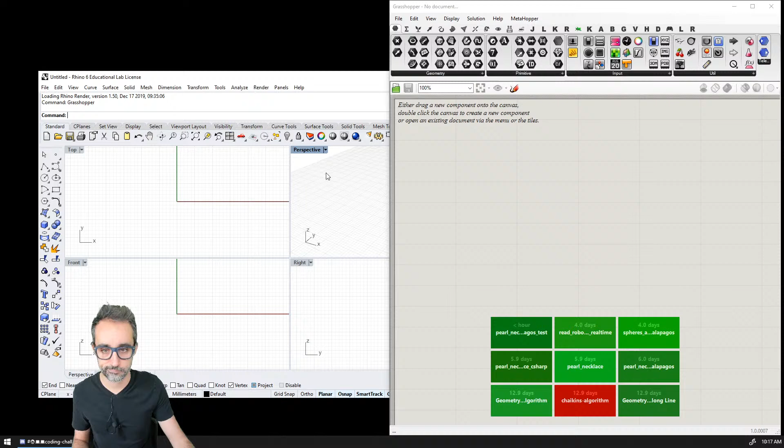So I'm going to drop this file. And I'm just going to pop here some curve, whatever. I feel like I always end up drawing the exact same curve, like this kind of gesture. Anyway, so here we saw, last week we implemented two ways of populating a curve with spheres, right?

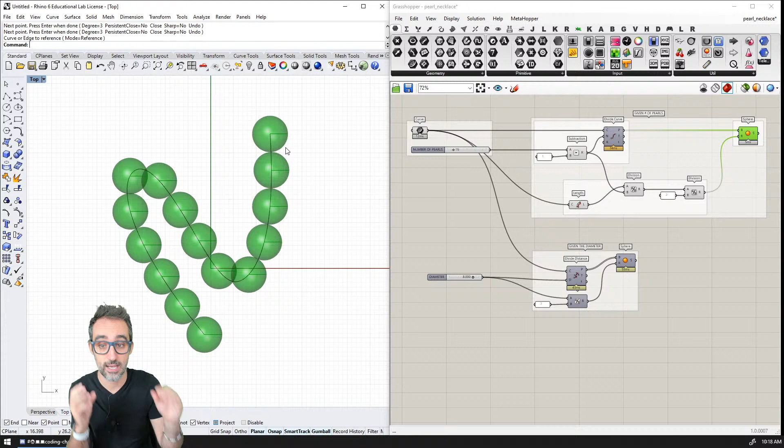One of them was given the amount of spheres, right? I'm going to do a top view here. Given the amount of spheres, we wanted exactly that amount of spheres on the curve, right? And if we control the amount, we can do a very simple algorithm where we subdivide the curve into equal length segments, and then place the spheres centered there, which is what we have, right?

The problem with that process was that, for example, this division between this curve is equal length to this one, but because this curve is concave, some of the spheres do overlap with each other, right? So that is a problem.

And we saw there was an alternative way, which is: well, if instead of controlling how many spheres we have, we control the radii of those spheres, and implement an algorithm where we make sure each sphere is tangent to the previous one and the next one, then we can implement that as well. But then what happens is that because we're controlling the radius of the sphere, we are not guaranteed that the last sphere will end at the end point of the curve.

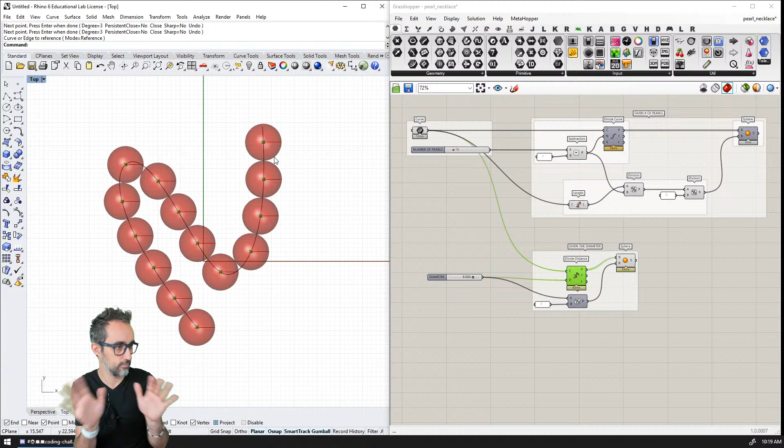And we will always have some remainder of distance between the last center of the sphere and the end of the curve. So the challenge, and this is a common problem, is that you cannot control all these parameters at the same time. You cannot control how many spheres you have on the curve and the fact that those spheres are perfectly tangent to each other. There is not a closed form solution to that problem, and not one algorithm that can give you that solution, because it depends very strongly on the shape of the curve.

So one way to solve these kinds of problems is through optimization, through genetic optimization, which is basically trying many different values and finding which one gets closer to an optimal solution. So for 15 spheres, let's try a lot of different diameters and see which value gives me something as close as possible to having this point be distance 0 to the end curve.

In Grasshopper, we can do optimizations with Galapagos. So the challenge for this week was to take this file and find a way to implement optimization with Galapagos, so that you can control both the fact that you have a controlled amount of spheres on the curve, and the fact that all of them are tangent to the neighboring ones, while fitting them with a radius that makes the solution as tight to the end of the curve as possible. One way of making all of those things work together is through genetic optimization.

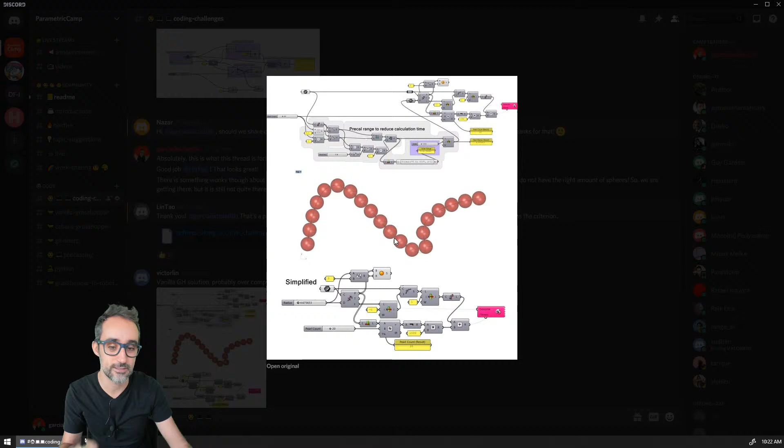That was the challenge for this week, and I'm very happy to show that a lot of people gave it a try, and some attempts got closer to the solution. Some were either missing one parameter, or the optimization boundaries got totally out of control. Some people did it in native Grasshopper, others implemented it in C#, even trying continuous execution, running a component multiple times until it converges to a solution.

I want to call this manual Galapagos, which I do want to get into at some point. I want to explain how to write code that does this kind of genetic optimization, but that's a little too advanced for where I think we are right now, or for the knowledge I'm trying to build, so I'm going to hold off on that.

I think Arasto is doing a really good job with these kinds of screenshots that explain the process, even with annotations and GIFs. How nice is this? And the optimization process, look, it's fitting, it's fitting, it's fitting. Bang! It fit. This is really cool. This kind of material for blog posts, for your personal website, and even for a portfolio is actually really good if you want to prove, for an application or employment, that you know what you're doing when it comes to code and design.

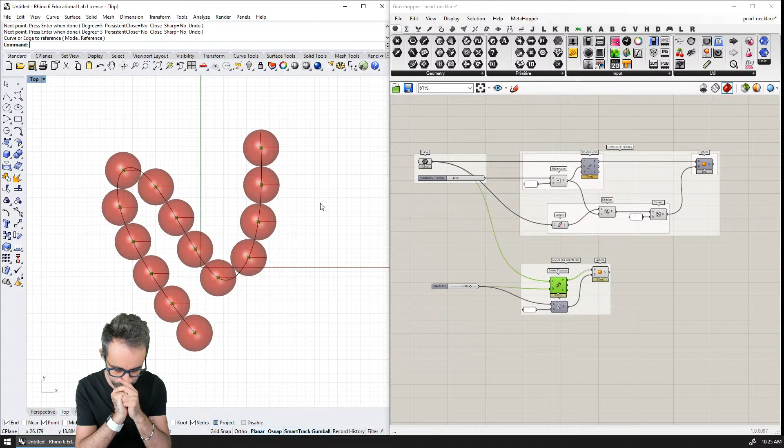Okay, so I'm going to do this video then. This is the third video in a series of other two where I solved this problem, first with vanilla Grasshopper and then with C#. So the third video, well, I think there's quorum on doing this one. This would be the third video on the series.

So I guess I'll do as usual, I'll record the introduction at the end. But I want to start the video by explaining what we're doing. I would explain that in the introduction, explaining the Galapagos thing.

So I think I'm going to start by explaining the problem statement, the fact that we cannot control everything at the same time. We cannot control the amount of spheres, the radius, and the tangency, and the fact that the spheres completely fit into the curve. So I'm going to explain that in order to do that, we need an optimization process.

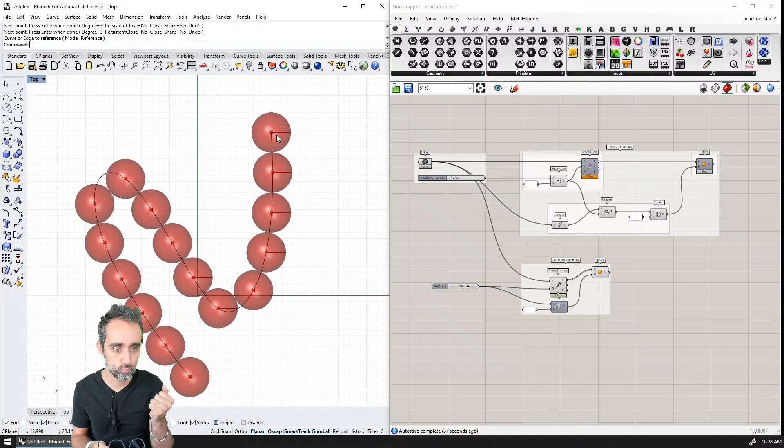And then we will use a genetic optimizer, so we will use Galapagos to try to solve that. I think that sounds good to me.

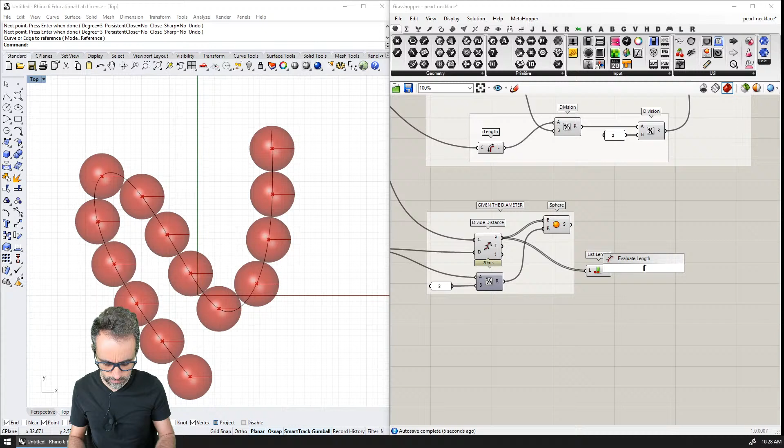Okay, and I need to add a component here to give me the length, how many elements I have in here. Okay, so I'm going to save this as pearl necklace Galapagos.

Okay, so I think we're ready to start, aren't we? I think we're ready to record. Yes.

I'm somehow having trouble finding the right words for this. I may have to do a couple of test runs first. But I know you're very patient when I do these things. So let's be a little patient on this one because I really want to get it right. It's also the first Galapagos related video that I'm recording, so I may want to take the extra time to explain some concepts until I record like a series, you know? Yeah, let's think about that. Okay, alright, so am I good in terms with the, yeah, okay. So let's start.

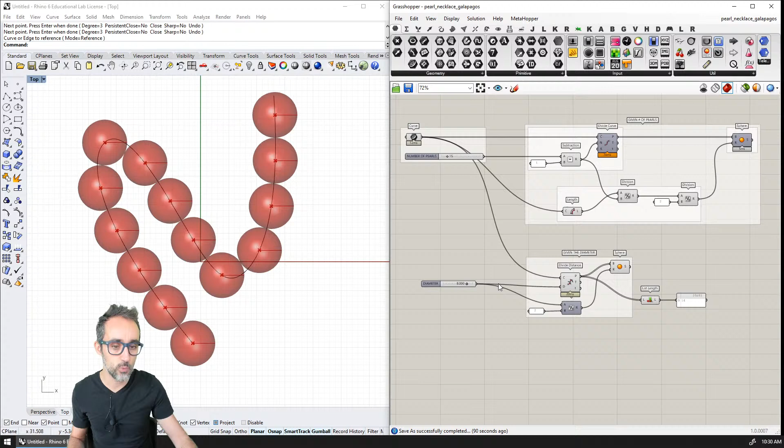Well, first of all, what I'd like to do before we start is make sure we understand the problem we're trying to solve very clearly. I'd like to remind you that we're coming from 2 videos ago where we solved the problem of trying to populate a curve with a bunch of spheres. We did it using vanilla Grasshopper, in 2 different ways. The first one was an algorithm where we could control the number of spheres. Because we subdivided the curve into segments where the chord length between them was equal, we knew all the spheres fit perfectly inside the curve, so the center of the last sphere was at the end of the curve.

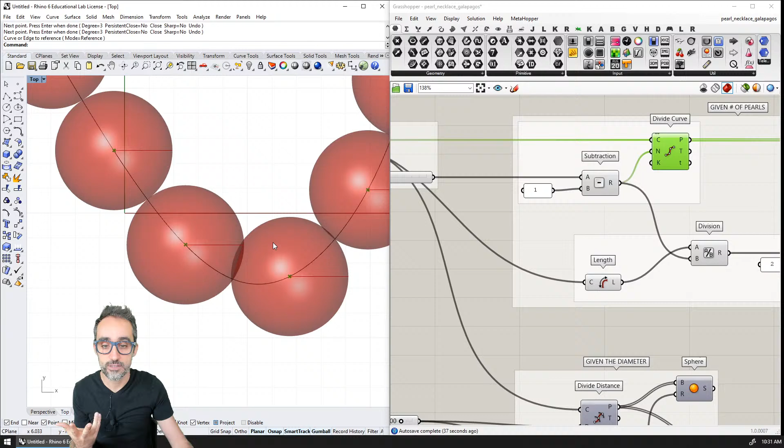The problem with this algorithm is that because we're using equal chord length of the curve, when that segment of the curve is very curvy, very concave, we have the problem of spheres overlapping each other. So you see this overlap here and this overlap here. That's not great if we're trying to model something that needs to be physically more accurate, right?

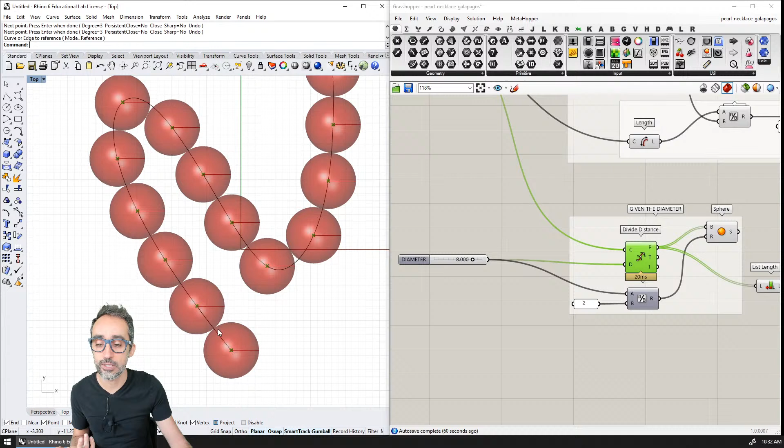So we did develop this other algorithm where instead we did control the diameter of these spheres, and what this component does internally is it places one sphere, it computes the intersection, it finds that, and then it places the next sphere, therefore guaranteeing that each sphere is perfectly tangent with its neighbors, right?

The problem with this one is that because we are controlling the diameter and this perfect tangency, we are not guaranteed, first of all, how many spheres we have. The smaller the diameter, obviously, the more spheres we have on the curve. And on top of that, we're also not guaranteed that the center of the last sphere is going to land at the exact end of the curve. Since this is whatever diameter, this sphere can end anywhere, basically.

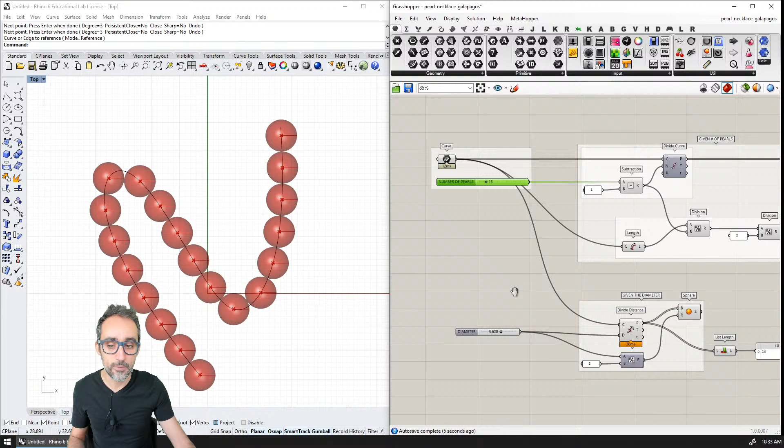So what we're trying to solve here is to combine more of these constraints. I would like to implement something where we can control the number of spheres. I'm also interested in the fact that these spheres must be perfectly tangent to each other. And on top of that, I want to minimize this distance so that the last sphere is as close as possible to the end of the curve.

With all of those constraints together, there is no closed form solution that I can use. Because where this sphere lands at the end of the curve depends very strongly on the shape of the curve, computing that algorithmically would be very complex, if it's even possible, which I'm honestly not very sure that it is.

So we're going to follow an optimization process. We're going to implement an optimization algorithm which tries a lot of different values of the diameter, basically throwing a lot of different dice, going through different ranges of values for the diameter. It's going to check first if we have the right amount of spheres, and then if the distance between the last sphere and the endpoint of the curve is as close as possible to zero.

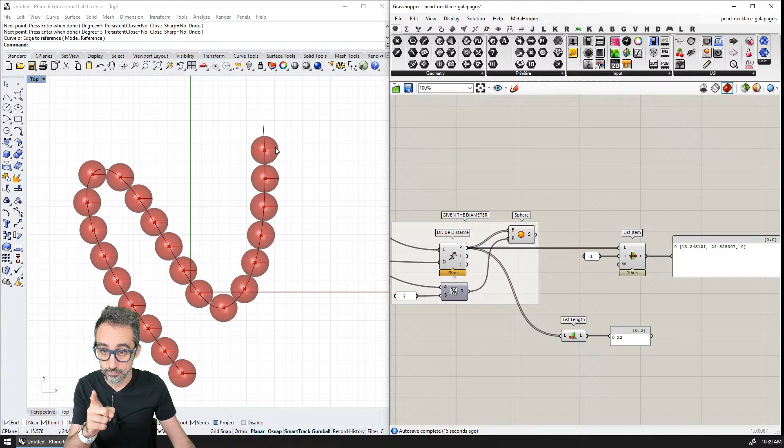Now, I also can take from the curve, there is the endpoints component that gives me, from a curve, the starting point and the end point, okay? So I could calculate the Euclidean distance, the physical distance between these two. And you know what? I'm actually going to start with that, but I will explain in a second why this is not what I really want to do. We will get there.

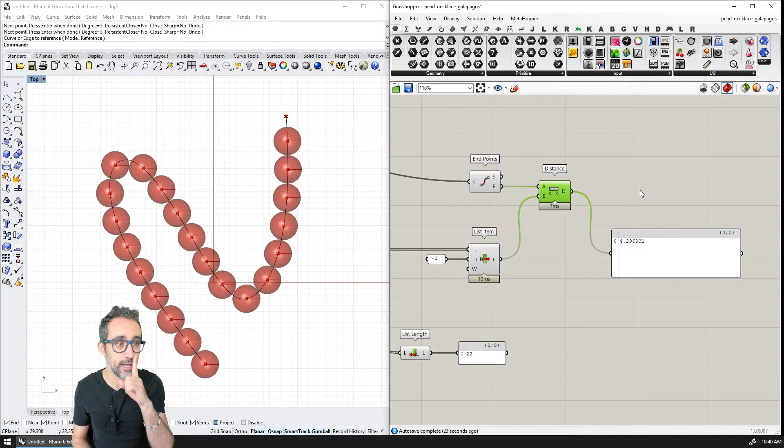So this distance is the parameter that I want to optimize. And by optimizing, what I mean is that I want to make sure that when I start trying different diameters for these spheres, this value is as close as possible to 0. That would mean that this sphere will be as close as possible to the end of the curve, right? And I think with this, at a very basic level, I'm already ready to start implementing a basic Galapagos test, because I have what I want to optimize.

I have the diameter of the spheres, and I also have the fitness criteria. The fitness criteria is the one value that I want to either maximize or minimize, the one value that I want to make as large as possible or as small as possible. And in our case, it's going to be this one, the distance between the center of the last sphere and the last point of the curve. So I'm going to drop here a Galapagos solver. This is here under utils.

You can just plug in Galapagos and you can see that, because this is an evolutionary solver, everything is phrased in terms of genome, fitness criteria, gene pool, evolution, etc. But it's actually much more simple than it sounds. So there are two things that I want to control. First is the genome, and the genome is how Galapagos refers to the value that I want to explore so that I can find an optimal solution for that value. In this case, that's going to be our slider for the diameter.

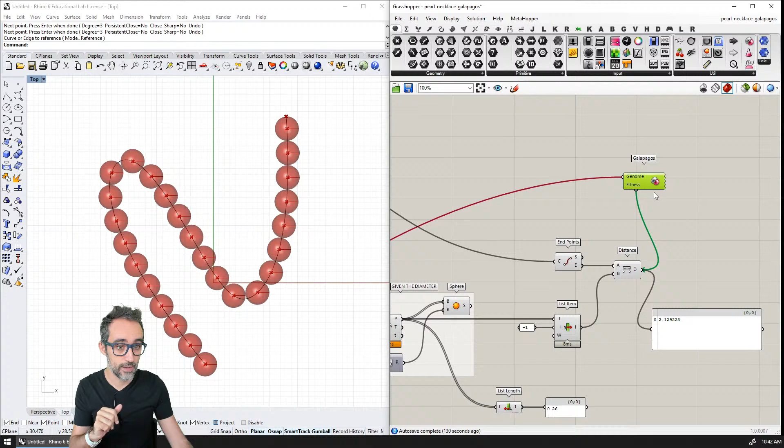That's the basics of how Galapagos works. So I can double click here right now, and you can see that in the editor, I have a lot of options. I'm not going to get into this at all. I have some links to blog posts by David Rutten, the author of Grasshopper and the author of Galapagos as well. These blog posts are actually really nicely explained, and they have really good graphics and really good illustrations. So if you're interested in this topic, I really recommend that you check this out.

The only thing that I would like to touch here, which is very important, is the fact that for the fitness, I have two options: maximizing the fitness or minimizing the fitness. In this case, I want to click on minimize because I want this value, the distance, to be as close as possible. If it was the other way around, if I wanted some value to be maximized, then that's what I would click. And then I'm going to click here on solvers.

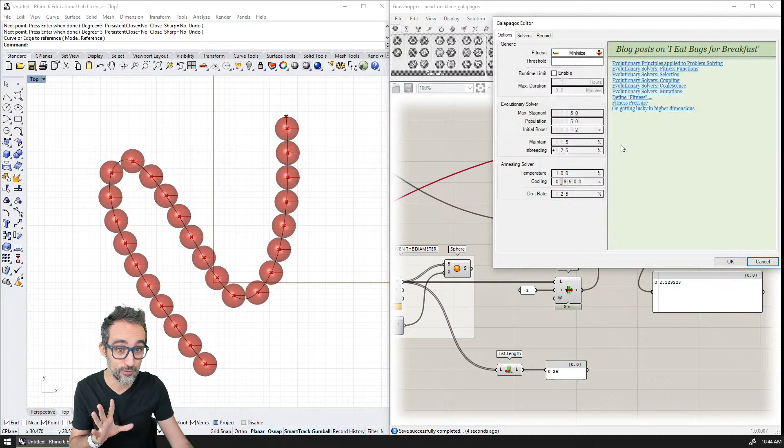Solvers is the area that gives me access to two different solvers, the evolutionary one and the simulated annealing one. I'm also not going to get into the weeds of how they work or how they're different. I will get to that at some point in the future. And then here is the Start Solver button. Let me first save this file because I believe we may run into performance and crashing issues. So let me do that.

And then when we go to Solver, I'm going to try my first run at solving this. So I'm going to double click here. I'm going to put this here. I'm going to put the solvers here, and I'm going to hit Start Solver. And what we're going to see is that Galapagos is going to start messing with the values of the diameter. So you can see that Galapagos right now is trying a lot of different values for the diameter, and is reading here from the distance what distance is getting, right?

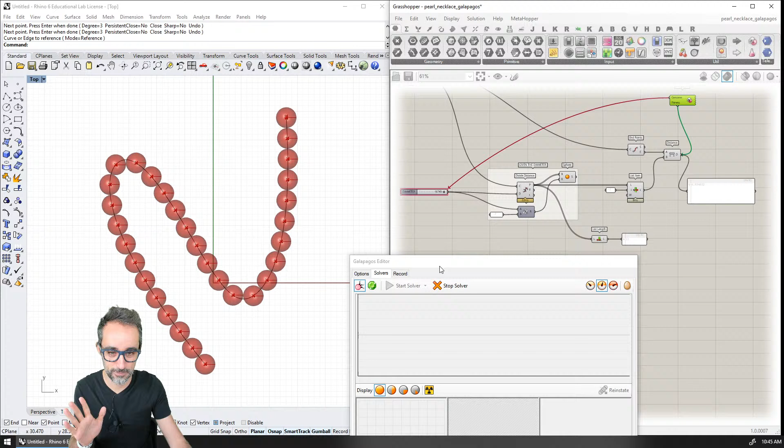But you can see that my computer is starting to be not very responsive, and I actually believe that we will probably crash very soon. Is that true? Are we crashing? Crash, crash, crash. Oh, it is crashing. Poor Galapagos. Oh, it's back. It's back. Well, I'm going to stop this. And you see it's not being very responsive right now.

I'm going to stop this because there are a couple things that I would need to change here. Okay? And I will explain why this is not. Oh, bong, it crashed. Oh no. All right, so you see, I'm going to need to restart. Let me restart and I'll get back to you in a second, okay? Okay. Oh, we crashed.

Yeah, actually, Arasto, you're right. That's one of the reasons spheres are kind of expensive, but it's actually not a problem with the spheres. It's a problem with the, what is it called? With the divide distance component, and I will explain that in a second.

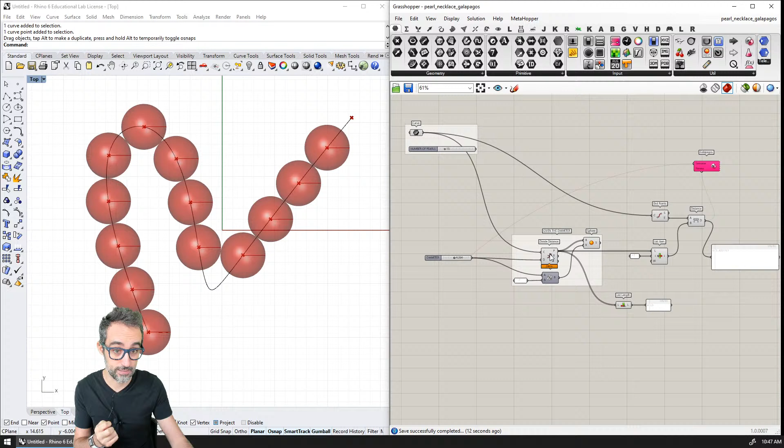Okay, so I need to explain now that the problem was that the slider can get very small. And when it gets very small, then this computation tends to infinity, basically. So that will be one thing to solve here.

Okay, we're back. The crashing didn't hurt that much. It's okay. I have a different curve because I didn't save this file, but it's fine. So why did we crash? Well, when we do optimization, optimization can be a fairly computationally expensive process. So if we also have other computationally expensive processes as part of the optimization, then things get very expensive, really.

And one of the problems that I was having was that this slider here, the one that we are trying to optimize, I didn't really take good care of making sure that the boundaries, the range of this slider, was good for an optimization routine. And what do I mean by that? Right now, the value of the diameter could range anywhere from 0 to 10. And look at what happens if Galapagos starts going into values that are on the lower range of this slider. So if the value of the diameter starts getting smaller, you can see that the divide distance component starts getting more expensive.

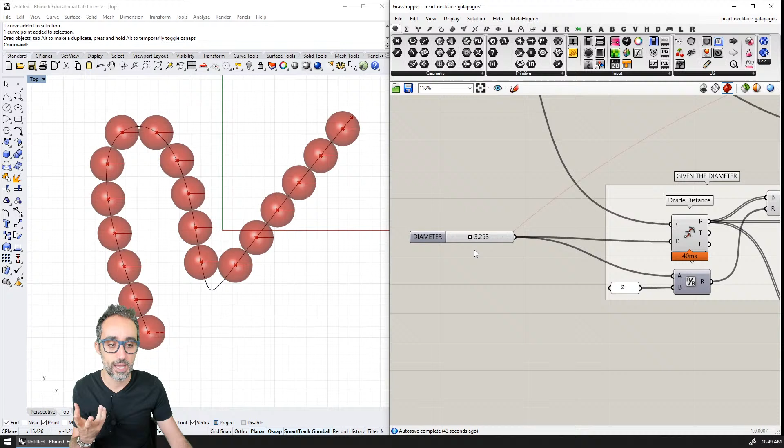expensive operation. So that's why as I go smaller with the diameter, you can see that the computation that it takes this component to execute just increases a lot. And right now it's blocked. You can see for this diameter, it took almost a full second to execute, right? And then if I go even smaller, for example, 0.1, I think I may actually crash it again, but it will definitely take exponentially.

You see, I'm crashing it again. No. Did we solve? Oh yeah, it solved. It took 10 seconds to compute this operation, and also to render however many hundreds of spheres there are here is also a fairly expensive operation.

So Galapagos was crashing because it was requesting very expensive operations due to the range that we had set for this slider. So one way to solve that is to constrain the parameter space that Galapagos can use to explore this particular value. And you can see that because we have 0, the closer we get to 0, the exponential growth in computational time could even lead to infinity, right?

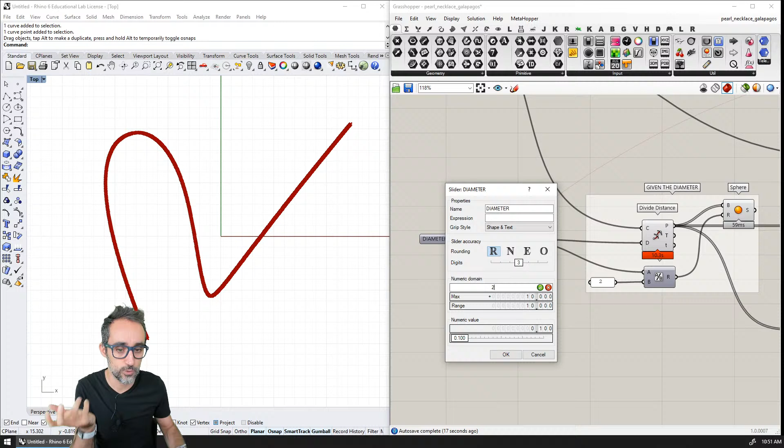So let's bound that. Let's say that the minimum value of the diameter is going to be 2, and the maximum value is going to be 10. We don't care, right? But as we do that, you see that the minimum boundary of 2 is, for the scale of our curve, something that is reasonable. So Galapagos is going to have a much easier time now dealing with this.

So I think now we are ready to give it another go. I'm going to double click here, keep minimize, use the default evolutionary solver, and start solving. And you can see that Galapagos now has a much easier time switching between values. It doesn't get stuck on one value that requires a lot of computation, right? And you can see this is very nice.

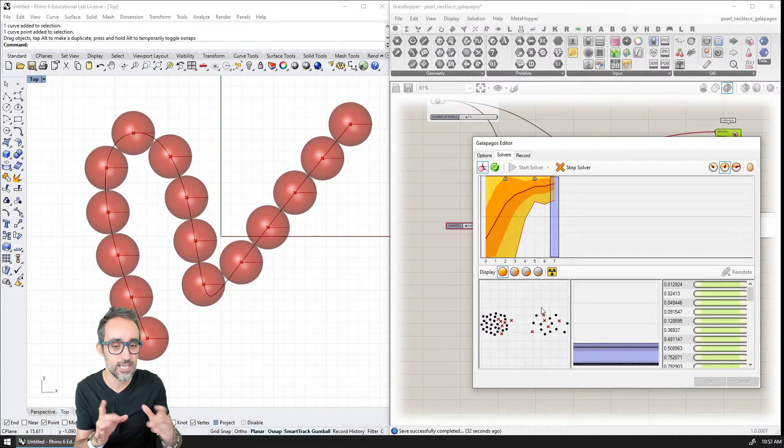You can see how Galapagos now is basically exploring, and the interface is really nice for this. It's exploring a lot of different combinations of this value of the diameter, and it's trying to find the ones that give us a smaller value for that distance between the center of the last sphere and the last point. And you can see that right now it's actually reached a very optimal solution, one that is only 0.01 units away from the end of the curve.

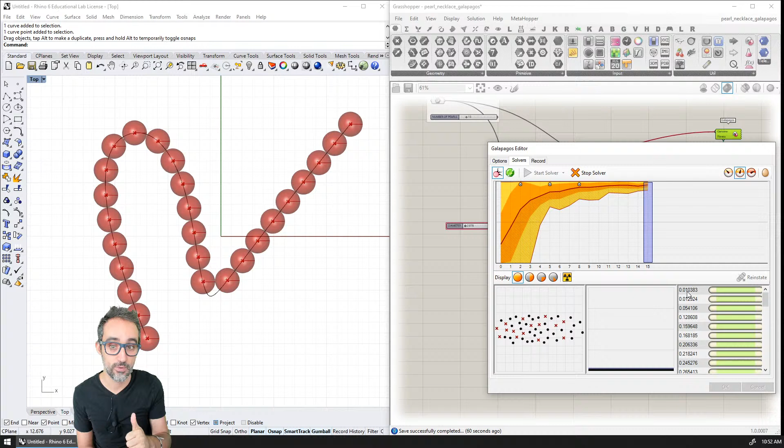That's another thing with genetic optimization. Very often you don't get an exact result. It's very likely that we're not going to find a result that gives us 0 as the distance between them, just because we're trying to get an approximation by doing heuristics, is the technical word, by doing a lot of tests and trials and then finding one solution that is optimal.

And something very interesting happened here, which is what I want to talk about right now. You can see that if I stop the solver now, the solver found a solution that is even closer than the one I was showing before, 0.004 units away. So if I zoom in here, they're so close to each other. Not quite perfect, but good enough. This is how optimization is. It doesn't get perfect, it gets just good enough.

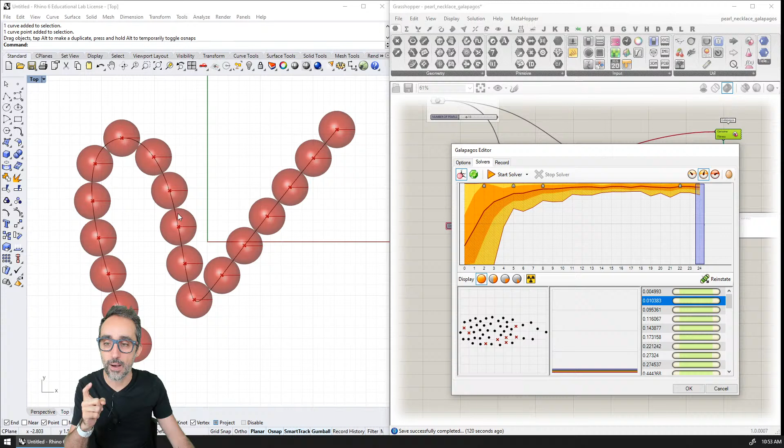But the funny thing is that it found it. I don't know if you remember, but for this solution, we had a much larger number of spheres than for the solution that we're seeing right now. And the reason for this is that right now, the way we have set all of these, we are finding a solution where the sphere is as close as possible to the end. But right now, the one that Galapagos converged into, instead of having 15 spheres, it has 18.

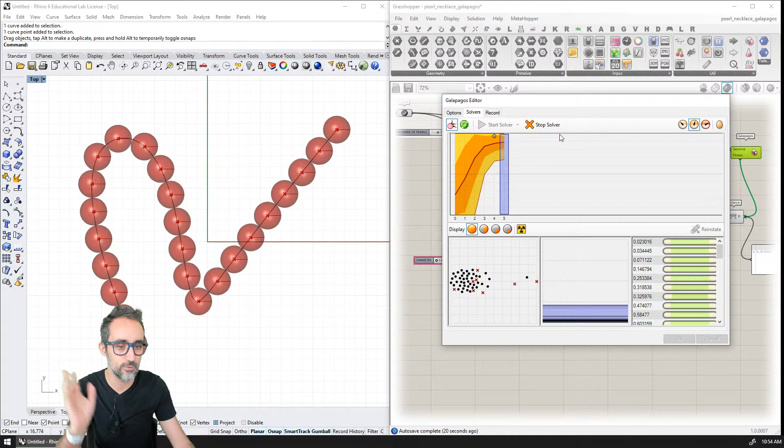And if I were to just move this value around and run the optimization again, then it will probably end up converging into another solution that is also very close, that has the last sphere very close to the end, but it's also not 15. You see, for example, it already found one, now it found another one that is a bit closer, now another one that is a little closer. And if I were to stop here, for example, you can see that the result now is like 29 spheres.

The problem here is that now we're getting close to what we want, a perfectly fit set of spheres that are tangent to each other and fit the curve very nicely, but we're not optimizing at all for the amount of pearls. We're not anywhere here in the algorithm specifying that we actually want a controlled amount of spheres. And so how could we make that happen?

Well, we have to understand that because Galapagos is just finding random diameters, among that randomness, whenever it finds a diameter that gives whatever combination of number of spheres, but a good fit on the curve, that's where it converges, right? So what we need to do is somehow, in this process, make sure that the amount of spheres that we want is accounted for in two different ways, as a minimum range, but also as a maximum range.

So there are a couple things that I would like to do now. The first one is going to be to discard all the solutions that give me spheres above the ones that I want. I'm going to discard all the solutions that give me more spheres than the number that I do want as a target. Okay, so let me show you how to do that.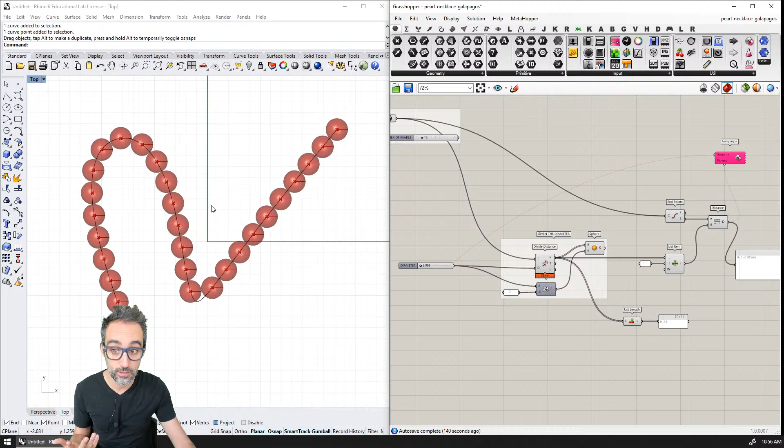Okay, so how are we going to do that? Well, that is going to be just as easy as whenever we calculate all these points here, we're just going to remove the ones that are over 15. And because we will end up with spheres somewhere here, then that distance will be very long. So I don't want to do that.

That was not very eloquent. Okay, let's just do this. Let's just do it. So, yes.

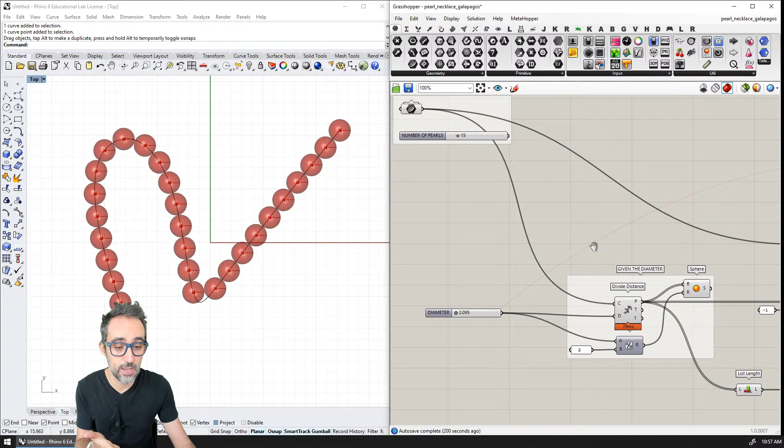As you can see right now, when we calculate the amount of divisions of this curve for a particular diameter, if it gives me more than the number of spheres that I want, I'm just letting Grasshopper use that many spheres as part of the calculations for fitness. So it's just populating all those points with spheres, and then it's using those for calculations. So that is the first thing that I will need to fix.

If when I do divide distance, I get more points than the amount of spheres that I want, then I will need to remove those points from the calculation and just stick to the first 15. So how can I do that? Well, I think it's as easy as taking the list of points that I'm getting from this computation and splitting the list in two with a split list component at index number 15, which at A is going to give me the first 15 objects, and in B is going to give me the rest, which I'm just not going to use.

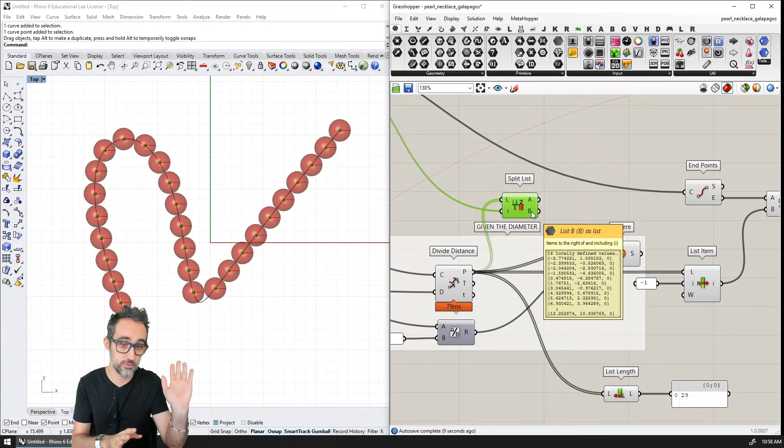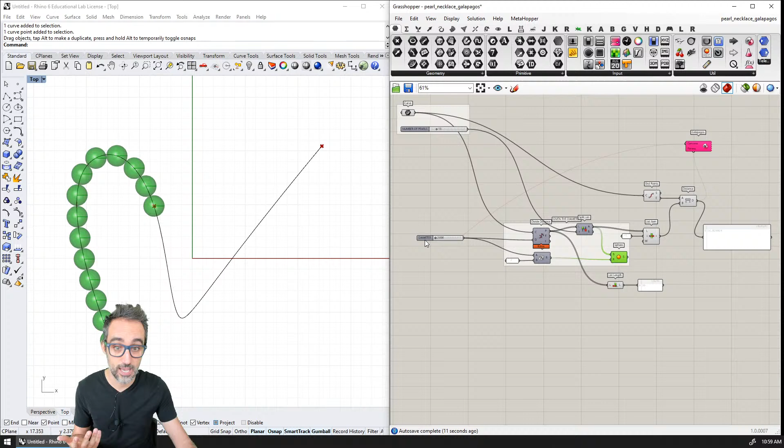So if I plug these 15 objects into this list here, then you can see that now I have basically discarded all the points that were beyond my first 15 spheres, and therefore when I calculate the distance, now this value is very large, right? If I make this very small, this value is very large. So Galapagos is going to pick that up very fast and start finding values that are closer. So let me start now the calculation with the minimum diameter, the value of 2.

So here I'm going to now run the solver, and let's see what happens. I start solving, and you can see that immediately it finds a smaller value, right? And it found an optimal solution with 2 spheres. Now with 6 spheres.

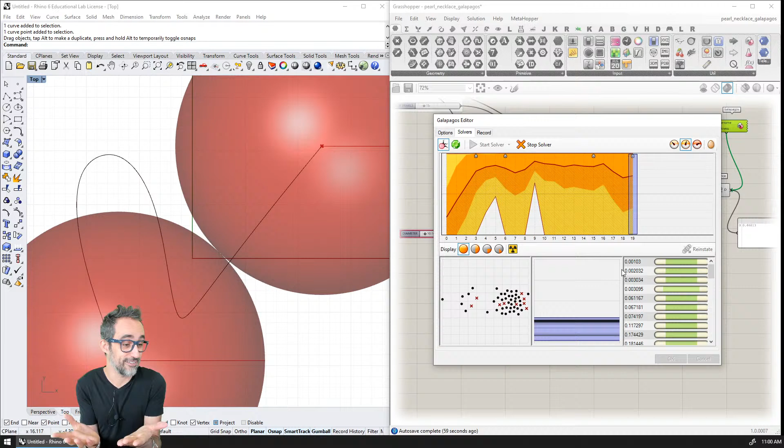And if we let it run a little longer, it will probably find some other more fit solution. Oh, again with 2 spheres. I mean, this is true, 2 spheres are fitting perfectly on the curve now. But you see, what we've done is we've managed to find a solution that is under the amount of spheres, because we've been able to penalize the fitness criteria if it gave a solution with way too many spheres. I find it really funny that it found such a nice solution for just 2 spheres.

So what we would need to do now is find a way to penalize the fitness criteria if it gives too few spheres. If it gives me a solution like this one, where we only have 2 spheres, I need to somehow artificially increase this value a lot so that Galapagos thinks this is not an optimal solution.

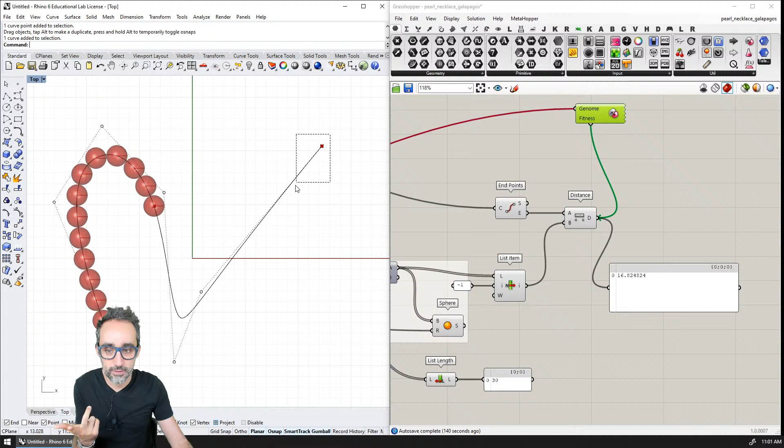This relates to a problem I mentioned before, and the fact that I'm not very happy with the fitness criteria being the Euclidean distance between the center of the last sphere and the end of the curve. Because think about this: it could happen that if this is what I'm using, and I take this curve and put a point somewhere very close on top of the curve...

For example, if I'm here, it could happen that Galapagos finds a solution where it populates all of this with spheres all the way until here without actually closing the loop, just because the Euclidean distance at some point here is very small.

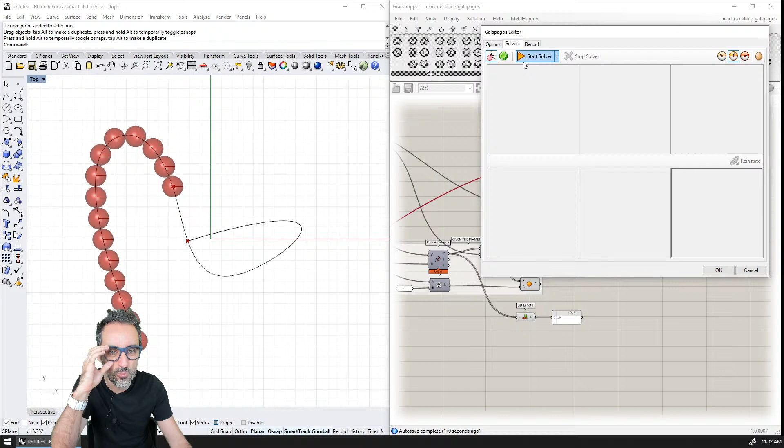Let's try this, let's hope we get some luck and find something like that. You see? We did. So we're now converging to a solution where the last point is very close to the end point of the curve, but not in the way we want, not fulfilling all of the curve. So for me, Euclidean distance is not a great measure of what I want to do.

So how can we change this? What I would propose instead of using Euclidean distance is to use the domain of the curve.

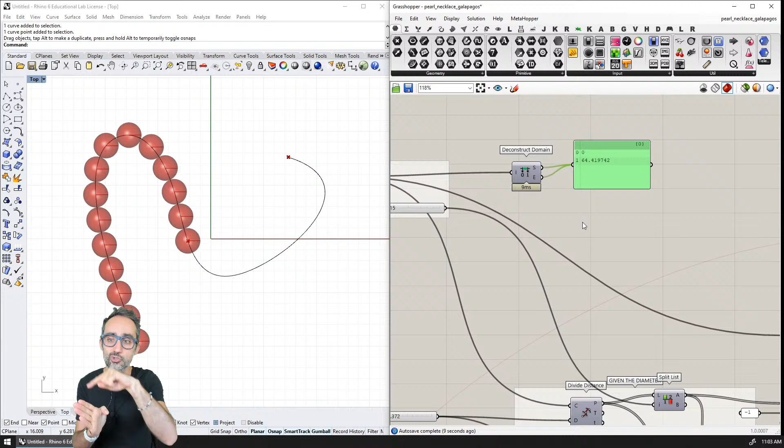What does that mean? If you've seen my other videos, you know curves have this thing called the internal domain. So I'm going to deconstruct the domain, and if I plug in this curve, you can see it starts at 0 and ends at 64. Curves have this domain, which is basically a measure of the internal length of the curve.

It's not exactly length in terms of world units. It's more of a concept that isn't very straightforward, but it's basically how the internal points of the curve are distributed along that curve. The main takeaway is that we can measure where we are along a curve, both in the length of the curve, the length of the chord, but also as in which parameter we are along the curve.

So the parameter is that value between 0 and, for this curve, 64.41 - again, this is not the length of the curve, this is the domain range of that curve. So if we say I want a value whose parameter on this curve is, for example, 10, it will probably give me a point somewhere around here. And we know the end point of the curve is at parameter 64.41 of this curve.

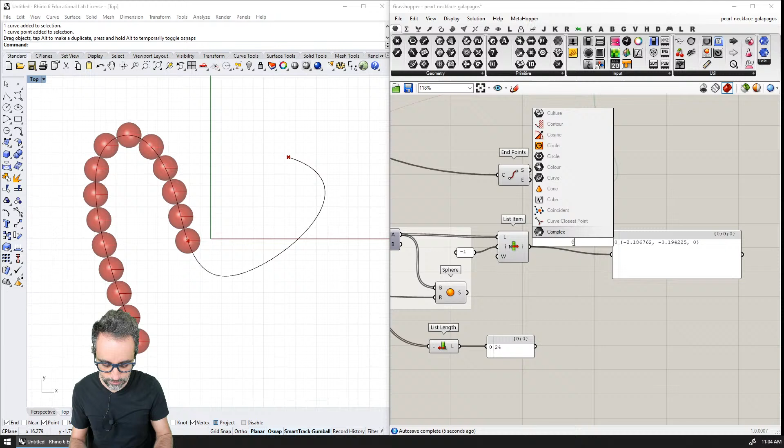Which means I can measure where a point is along a curve by finding the parameter of that point on the curve and computing how far along the curve I am. So how can I do that? If I take this point here, the last point of my subdivisions, I can say: find the closest point on the curve for this point. And that point is probably going to be, since that point was already on the curve, the exact same point.

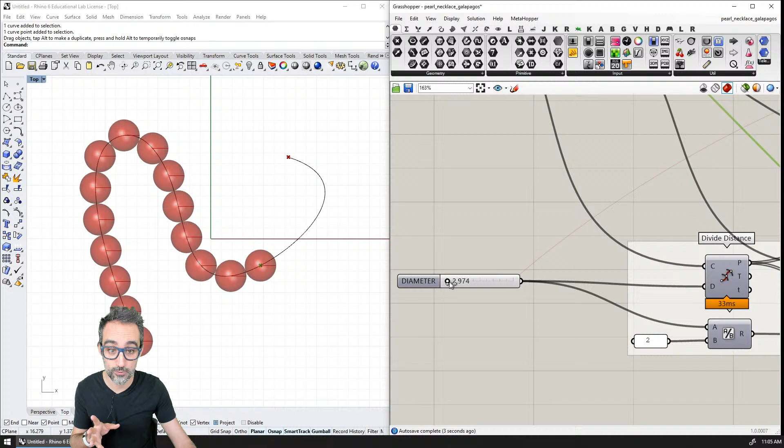This component also gives me this thing called t, which is the parameter on the curve domain of this closest point. Right now it's 38, which is kind of halfway between 0 and 64. If I start cranking this up and try to bring it all the way very close to the endpoint, this parameter is going to be 62 point something, very close to 64. So I think using the parameter of the center of the last sphere and the parameter of the endpoint of the curve is a much better way of finding a fitness criteria for this.

What I'm going to do is subtract this value. If I subtract the value of the parameter at the end of the curve with the value of the parameter of the last point of the sphere, this value right now is like 1.4 something. If I reduce the radius, this value is much larger, but if I crank this up so that it's closer, this value becomes much smaller. So this is a really good candidate now for optimization.

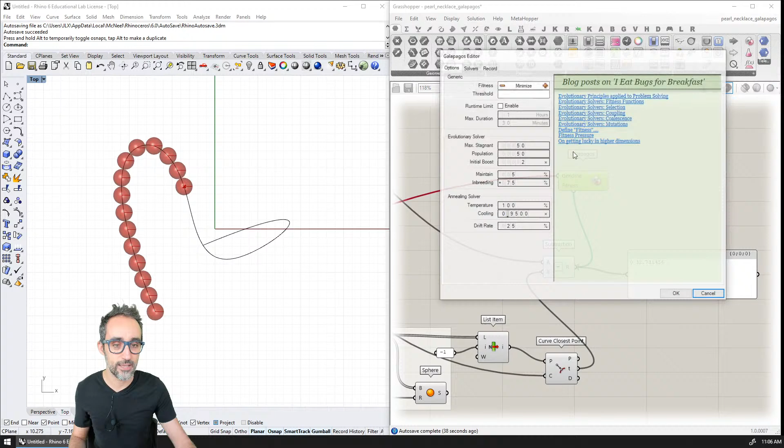So I think curve domain is a better approach. We are now in a better position, but we still have the problem that we are not going to find a solution that gives us more spheres than the ones that we want. But we may find a solution, like we just did, that gives us fewer spheres than the ones we want. So what we need to do now is find a way to penalize the fitness criteria if the spheres are less than the ones we are targeting.

I think for that I'm going to have to draw a diagram to explain that concept. So let me get into the whiteboard.

All right, how is this going? Is this clear? Am I making things fuzzy? What do you got? What do you think so far?

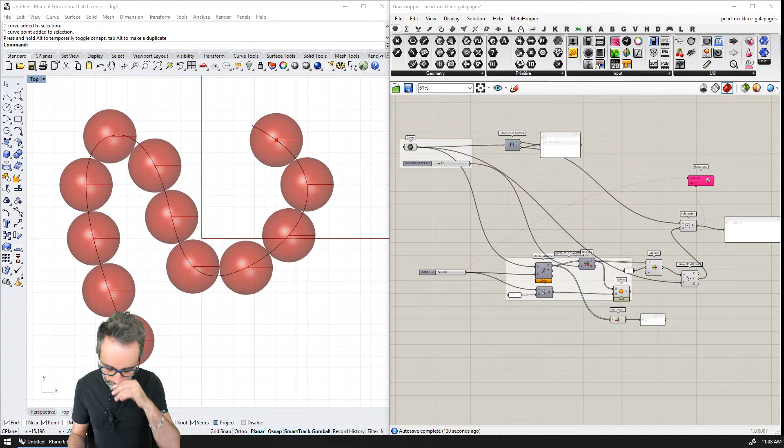Okay. I need a sketchbook. Okay, so, oh yes, drawing here.

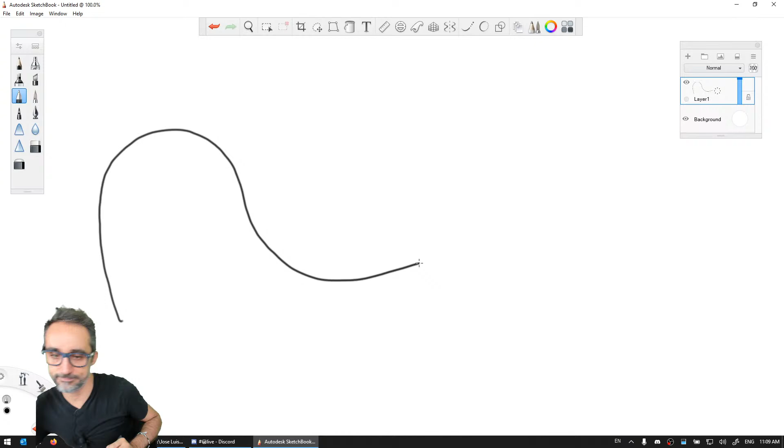I'm going to draw this curve here. Now I'm going to draw a curve like this, and I'm going to draw points like, oops, another layer, so points, points, points, points, points, points, points, and this one is going to end up here, for example. And then what I would like to explain is that if we stay too short, then it's easy.

But if we imagine that we extended this curve like this, for example, and then we started, so, and then if the parameter here is 0, and the parameter here is 64 point something something, right?

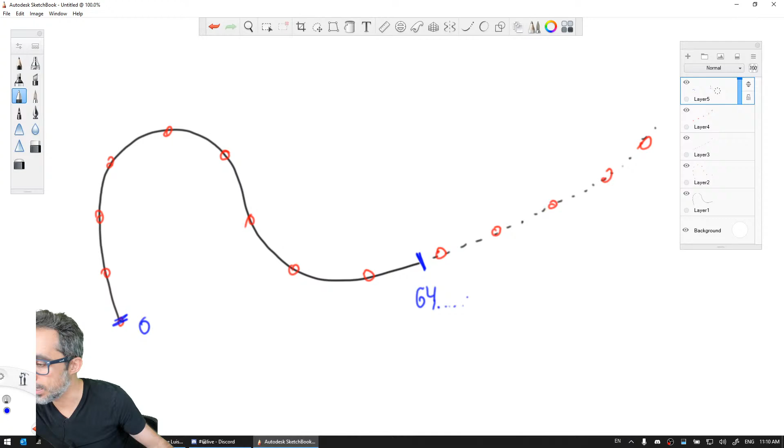So what I can do is artificially come up with a larger value for this parameter, so that, for example, this can become, I don't know, 91 point something something something.

Let me try to explain this, and if I don't make a good job about it, then I can redraw the diagram. Yeah, because I'm not sure what I'm going with this. I know it's in my head, but as with many things, explaining it sometimes is just so much more complicated than actually doing it. You're going to see that when we do it, it's just like multiplying two numbers. But I need to get the concepts clear and across.

Okay, let's do this. So what we want to do is find a way to artificially penalize the fitness criteria so that whenever we have fewer spheres than we want, the fitness criteria knows that is the case, by artificially changing the value of... you see, and starting over again. That was not right. What do I want to say? Penalize.

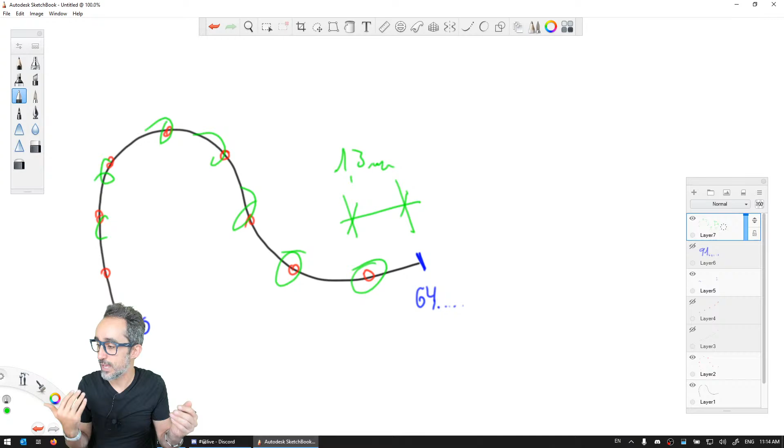It's just the result of the diameter of the spheres. We fit however many spheres, and then we calculate that. So Galapagos is not making any difference whether here we have 3, 10, or any amount. So what we need to do is make sure that this value also represents the fact that we may have more or less spheres than what we want.

And what we can do is a trick. The trick is that we're going to imagine that we were to continue this curve and actually fit the exact number of spheres that we wanted. Okay? What does that mean?

Imagine that here we have, for example, 7 or 10 spheres, but we actually wanted 15. So we can imagine that we extended the curve and the algorithm, and kept populating this curve with however many spheres. The idea would be that the last sphere will end up somewhere in the parameter space with a value that is actually much larger than what the domain of the curve can hold.

So if we were able to find out what this number is and use this distance as the fitness criteria, this would be like 23 point something something, which would mean that because that number is so large, Galapagos will try to reduce this number, therefore starting to fit all those 15 spheres closer and smaller inside the domain of the curve. This would only happen when we have fewer spheres here than the amount that we want.

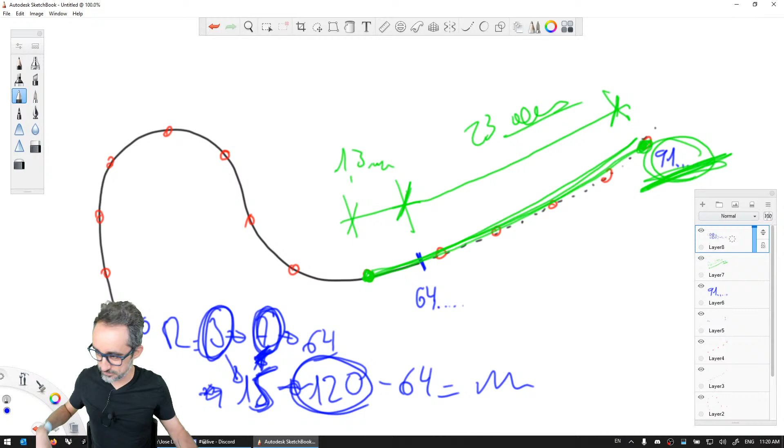Woohoo! All right, let me save this. Let me go back to the drawing board. How was that? What do you think? Well, let me show you how it's done, and perhaps that helps, because otherwise I think it's a little too theoretical. Yes. So we are here. I'm going to go back to 0. Okay. All right.

Okay, so back here, I have chosen manually a diameter that is giving me 7 spheres, which we know is roughly half the amount that we actually want, because we want 15, right? So we can make a very simple proportional rule and divide the number 15 by the number of spheres that we actually have. The result is going to be 2 point something, 2.1, because 15 is a bit bigger than 2 times 7, right?

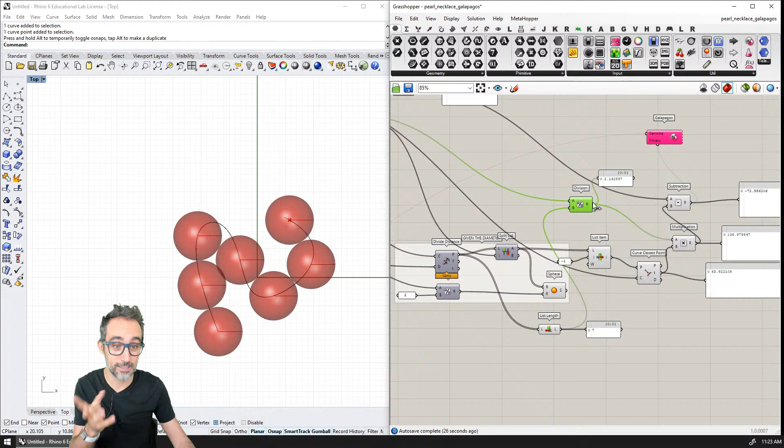So this is what I meant: it's much more complicated to explain than to actually do, because it's literally just one division and one multiplication. But let's run Galapagos now and see if this is going to work, which it's not, and let me save things in case it crashes. It's not going to work, but let's see what's going to happen.

Galapagos is going to start solving, but it's going to end up converging always into a value that is close to 2 spheres. And wait, how is that possible? Let me go back to this minimum value. If I try solving again, it's also going to start, explode, and converge into a solution that is just 2 spheres, the least amount of spheres possible.

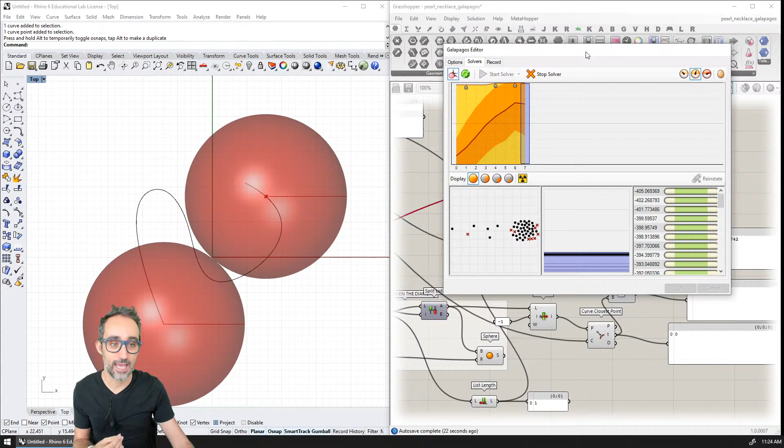Why is that? Because we have skipped a concept that is very important. Remember when I said that Galapagos is trying to optimize by minimizing a fitness criteria? Because we have artificially increased the domain where the last point ends, the value of this subtraction can actually be negative. And negative is actually a more minimal value than 0.

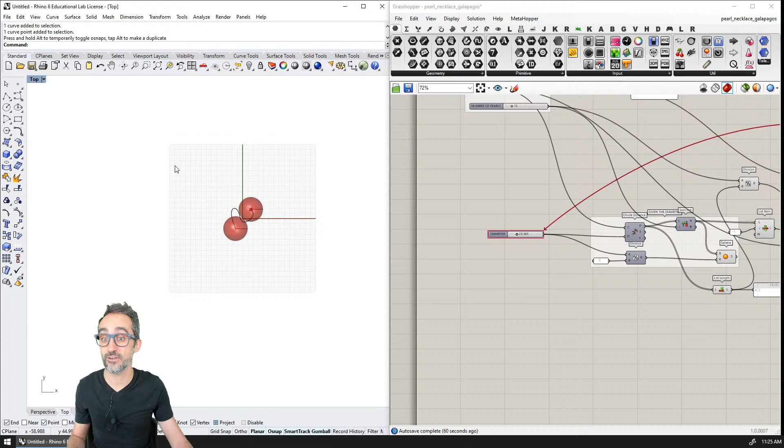So Galapagos tries to go as far down in the negative space as possible, because negative is less than 0. So it's more minimized in a way, right? So that's why Galapagos is always trying to get the most negative value here, which ends up being the one that has this imaginary sphere as far as possible in space, which ends up with us just having 2 spheres here on the real curve, right? So how can we solve that?

Well, then it's actually very easy. So we can just calculate, instead of leaving this value signed so that it fluctuates between very positive and very negative, we can calculate the absolute value so that minus 405 becomes positive 405, which is a really bad value for the fitness, which Galapagos will try to reduce to the value of 0, which is as small as you can go for an absolute value.

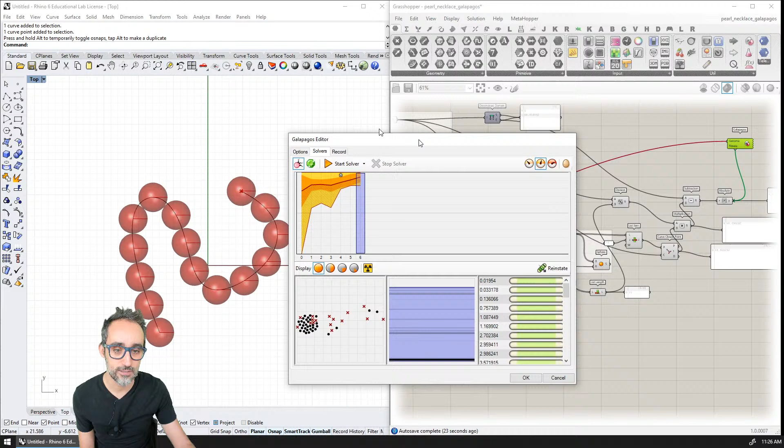And I don't want to disclose anything, but as we click here and we click on the optimizer and we start solving, you can see that we have now converged to a solution that is a pretty good solution. It's at 0.02 parameter space units from the end of the curve. And if I stop this, I can probably see that it's got 15 spheres, and I can zoom in and see that this value is very close.

If I now start from another value that is probably very large, like 1 sphere, I can also see that if I start the optimization process and I start trying to solve, the solver is going to reduce this number very fast. And I believe we are probably now at 15. No, we are not at 15 yet. We are at 15 now, I believe, yes. And we are getting closer here.

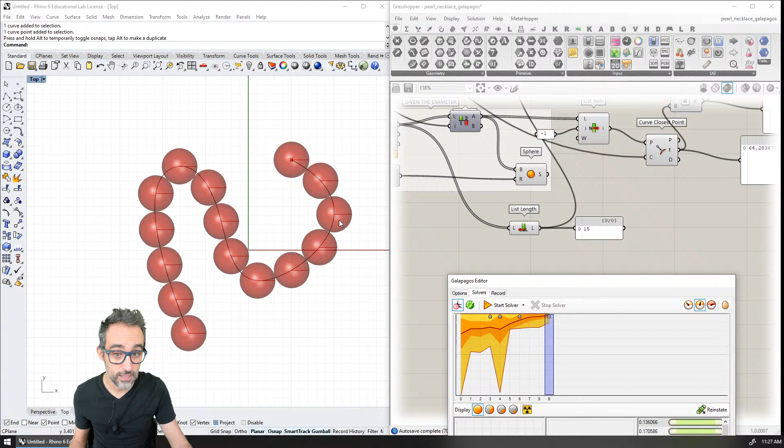I can't zoom in here. Oh yeah, I can zoom here. Yes. And if I stop, you can see that we are at 15, and we are also pretty close. I could leave this running a little longer, and we will probably find a value that is closer to the end. But I think with this, we have basically solved everything.

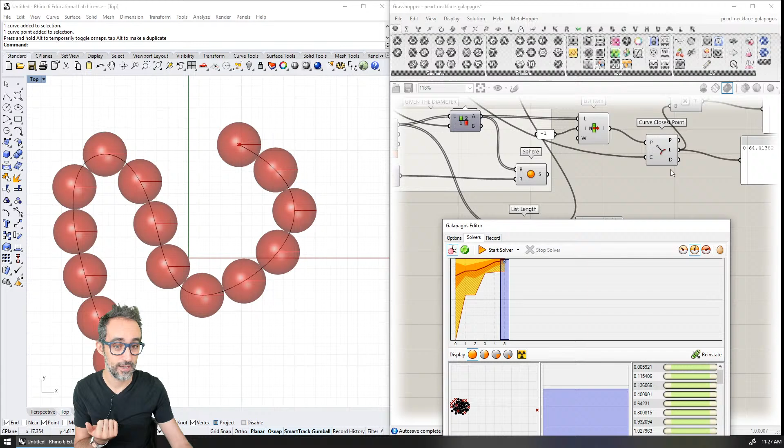Let me see. Yep, it did find a better value, or now a much better value even. So if I stop and I press OK, you can see that we're all super, super close. And again, with optimization, there's a compromise between computation and a fitness criteria, and we know that very likely we will not hit a perfect solution, we will hit a very optimal one, but not one that gives us 0 as the remaining parameter distance here for the curve.

Okay, so I think with that, this is everything that I wanted to explain today. I hope that by purposefully having run into all the possible problems and all the things that could go wrong while we implement this, I have made a good point first at explaining conceptually how genetic optimization works, but also at making sure that we understand the underlying concepts and how we need to do some numerical manipulation to make sure that the solving process always stays within the boundaries, but also gives us solutions that are constrained in the parameter that we're trying to solve.

This was the first video that I have recorded in this channel about optimization and with Galapagos. So maybe that's why I took a little longer to explain certain stuff, but hopefully I will at some point record a playlist with more in-depth material, like what is Galapagos, what are the options, what are the different solvers, and a series of different examples, basically an optimization playlist where I explain in more detail the underlying concepts.

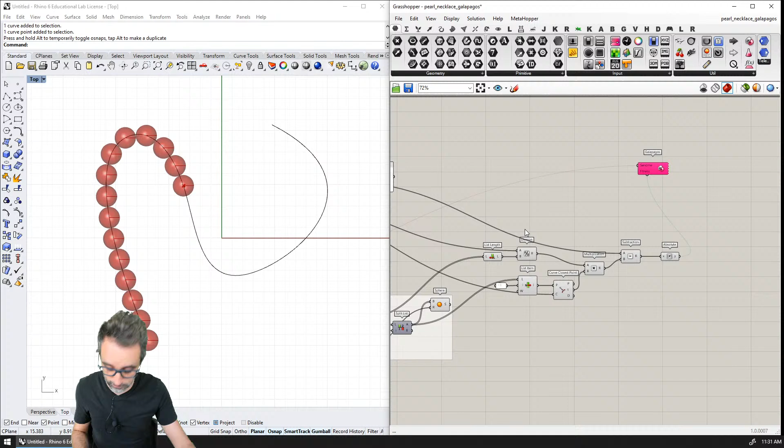So here I'm going to say compute fitness, compute virtual parameter distance from last center to end of curve. Not artificial, virtual. Yeah, I like that better. And deconstruct the domain. I will probably want to just move this somewhere here. And add to group. And then the diameter, I'm going to move it here. I'm going to add it to the group.

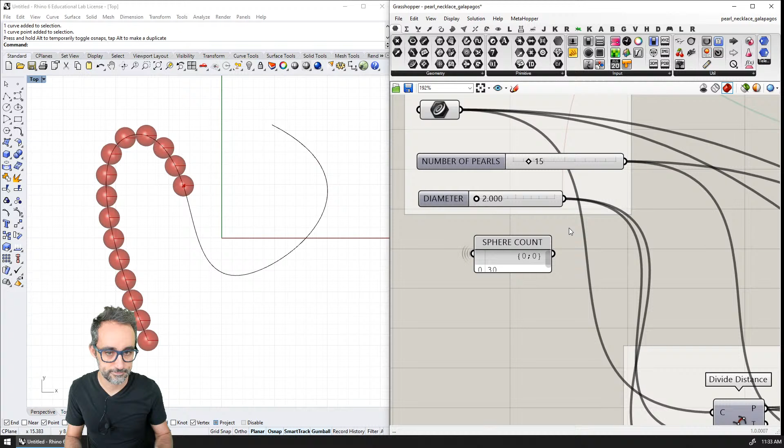Okay, so here, and I'm actually going to move this all the way to the beginning. I'm going to move it up. I'm going to remove this from the group. I'm going to put it here. I'm going to change the wire to hidden. Sphere count. Number of spheres.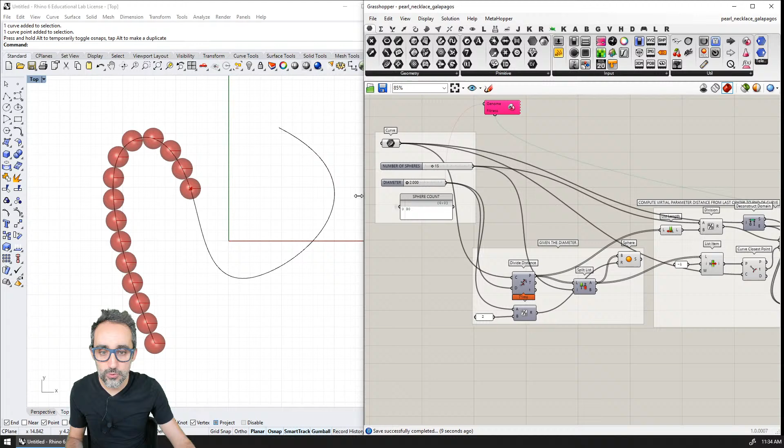Okay, and I think we don't need to show all of this for the introduction. We just want to show the thing running, and I may want to have room here for the optimizer. So if I double click here and fit it here, it looks good, and I think this is probably a good screen grab kind of situation. All right. Okay, so let me record an introduction. Oh, my head is in the way. Let's get this over here. Okay, that looks a little better. Okay, let's do an intro.

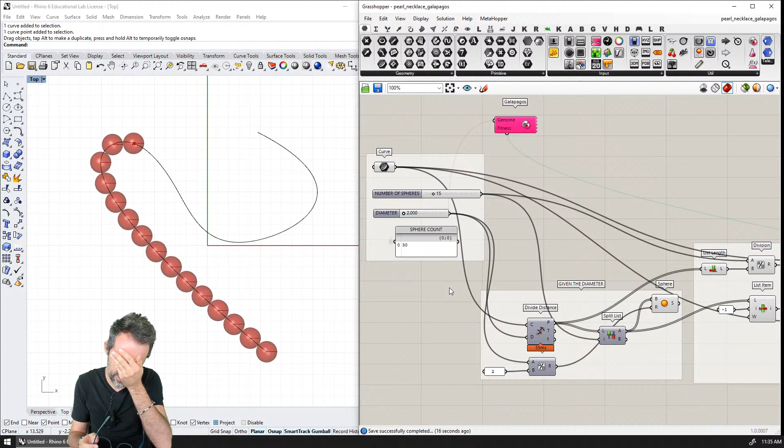I have a headache. Oh, yeah, I don't think I'm recording the other gem. I'm sorry. Okay. Hi, this is Jose Luis, and I'm... I couldn't even get through that. Okay, starting over again.

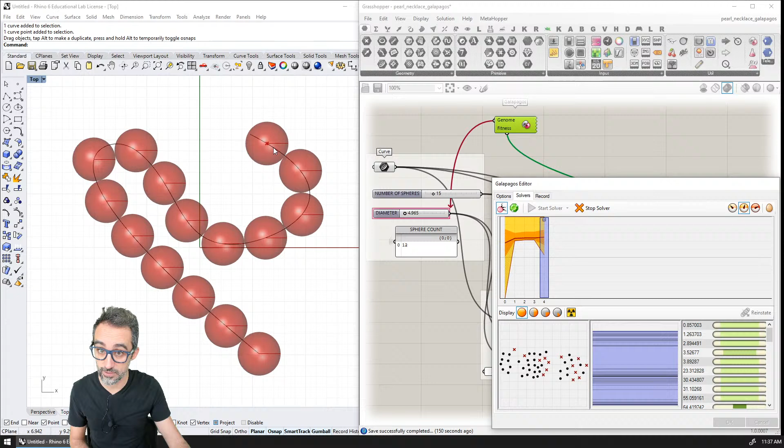And I'm going to show it working here. You can see that right now Galapagos is trying to optimize and is going through many different iterations of the diameter, trying to find one where it gives me 15 spheres, and trying to get this distance as small as possible. And you can see that over time, the more it tries, it's converging to a better solution, one that is giving me a very small distance here by the end.

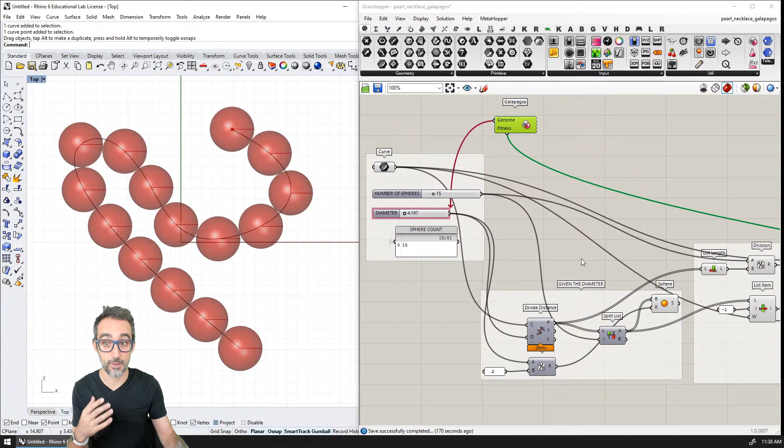So I think this is a really interesting exercise because it involves optimization, and it involves thinking about what's called a fitness criteria. So how do we generate a value that we use for the solver to optimize, to either minimize or to maximize? I'm going to pick it up where I left off two gems ago, where I implemented these algorithms in vanilla Grasshopper.

I'm going to pick it up from them, and because this is also the first optimization slash Galapagos video that I'm recording, I'm going to be perhaps a bit slower, and I'm going to stop in all the stages of the process and explain them very carefully, because I want to make sure that we understand everything that is happening. Hopefully at some point in the future, if you're watching this from the future, there will be an optimization playlist at some point, but it doesn't exist right now.

So I'm using this gem almost as an excuse to do my first introduction to genetic optimization. Okay, it's going to be a super interesting one if you're interested in optimization, and it's going to be a fairly easy one to implement. So stay with me, and let's get hands-on. Woohoo!

Oh, all right. I think that's it. Air conditioning. All right, I'm going to save this. I'm also going to save this. Why not? Okay. And I think that's it for today.

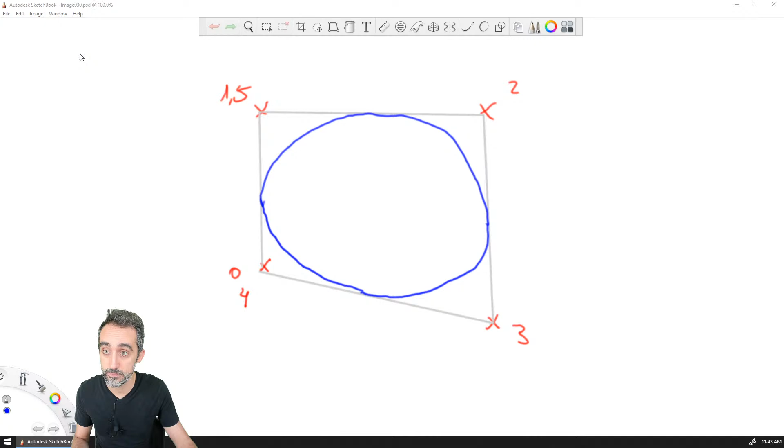So, let me close a couple things here. Let me open. Save as. What am I looking for? I'm looking for Chaikin's algorithm. I was here. Yes. Okay. And then the layers are. Yeah. Let's go back to this screen here. Okay. Where's the thing here? All right.

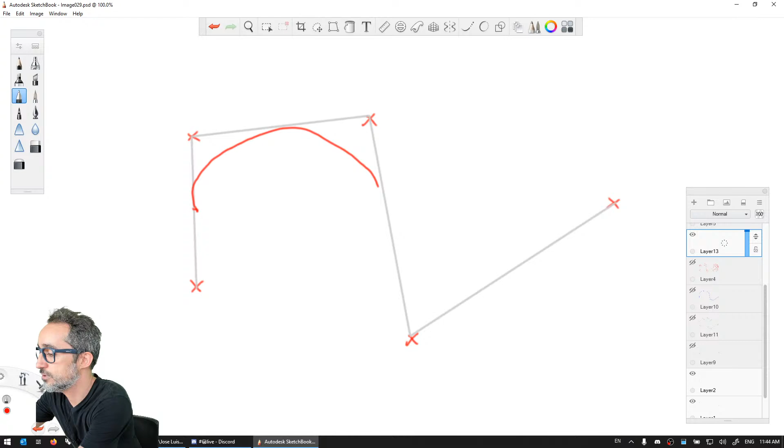Okay, so just a reminder for the challenge for next week: remember how we did Chaikin's algorithm. Can you hear me? Yes. Remember how we did Chaikin's algorithm, where we could start from a control polygon and we could end up creating like a smooth curve that touched that control polygon at the centers, right?

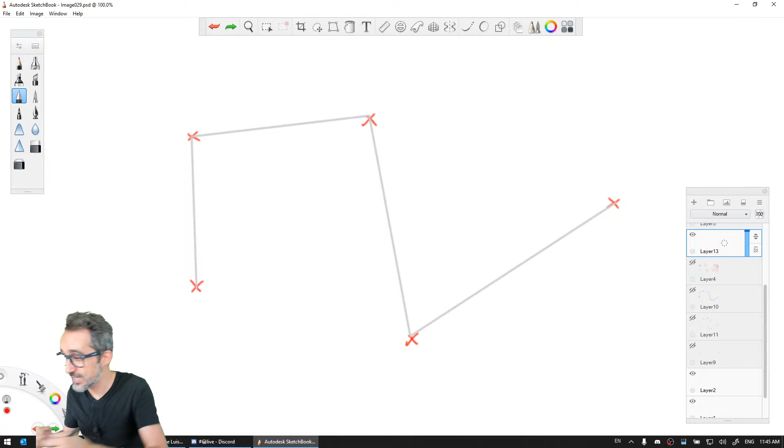The challenge for this week is I would like for us to try to implement a version of Chaikin's algorithm where we end up with the same result, but the start of the calculation, the input, is not the control polygon, but it's instead the points. So actually, let me turn this off. Actually, I'm going to explain this way. And I'm going to add another layer here, which is going to be this one here.

So the goal is going to be, I want to start with a series of points, and then I want to end up with a smooth polyline that passes through all of those points. And I would like for you to try to use Chaikin's algorithm to do this.

Now, the problem with this is that what we're actually trying to do behind the scenes is, starting from these points, we're going to try to reconstruct which control polygon would correspond to those points, so that the resulting curve that I create by applying Chaikin's algorithm to that control polygon is the one that ends up passing through those points.

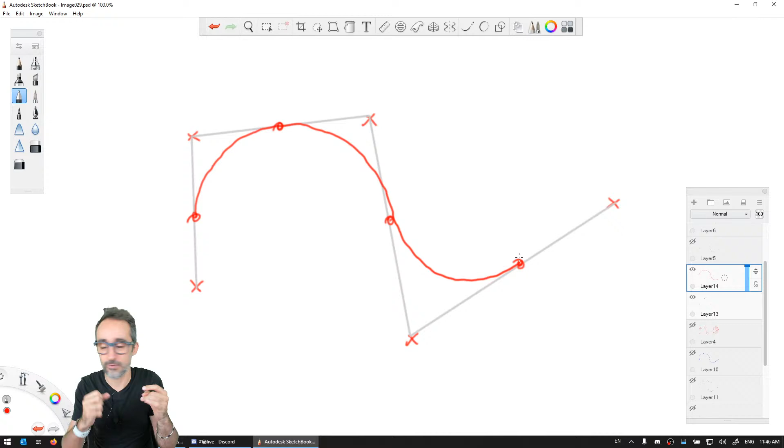This is an extension of the work that we did for Chaikin's algorithm. It's a very interesting one because it has many more practical applications than starting from a control polygon. A control polygon is somehow an abstract thing, whereas the interpolated points, the points through which the curve actually goes, are typically much more interesting, because if you're doing path planning for robotics, for example, you want the robot to actually traverse through those points. So that's typically a more interesting one.

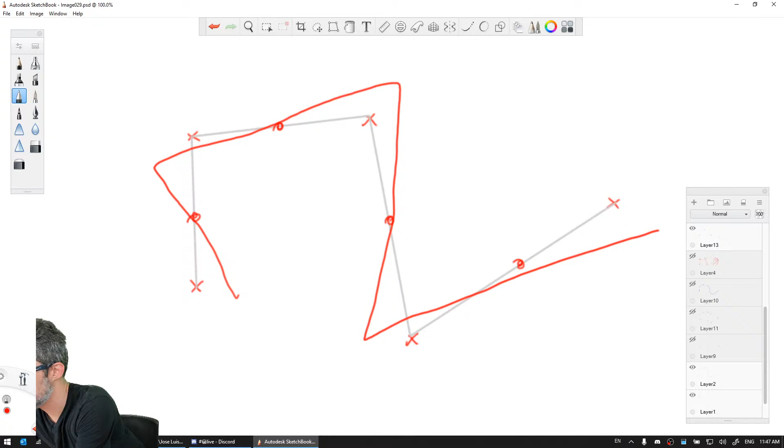I would like to say, though, that having the interpolated points and finding the control polygon is an unconstrained problem, which means that there are infinite solutions to that problem. This one that you're seeing here is one, but this other one, for example, this one, this one, this one, and this one could also be another control polygon. Even this one, this one, this one, and this one could also be another control polygon.

This one, this one, this one, this one, and this one could also be another control polygon. There are infinite solutions to this problem. Okay, so I have two suggestions. One, if you want the easy life, then in order to constrain this problem so that it has a closed form solution,

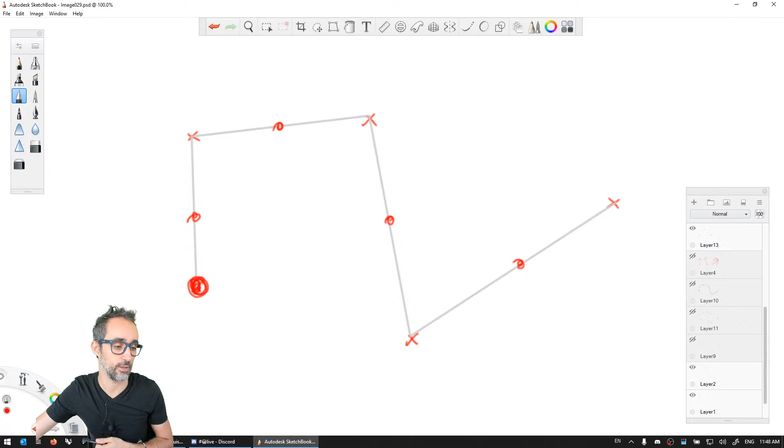write an algorithm where you have the input points, the interpolated points, but you also have this point, the very first point on the control polygon. Think of that as, somehow imagine that you had these points, and you had like a tangency vector of sorts, right? Where that tangent vector ends is kind of the start of this curve that you have here, right? That's if you want the easy life.

If you want the more fun, deeper life, then try to come up with a solution, probably through optimization, through genetics, through whatever, that gives you a control polygon from the infinite solutions that has some kind of optimization built into it. For example, one solution that I can think of is a control polygon where the overall length of this polyline is as small as possible. That will probably give you a control polygon that is kind of a good fit to those points.

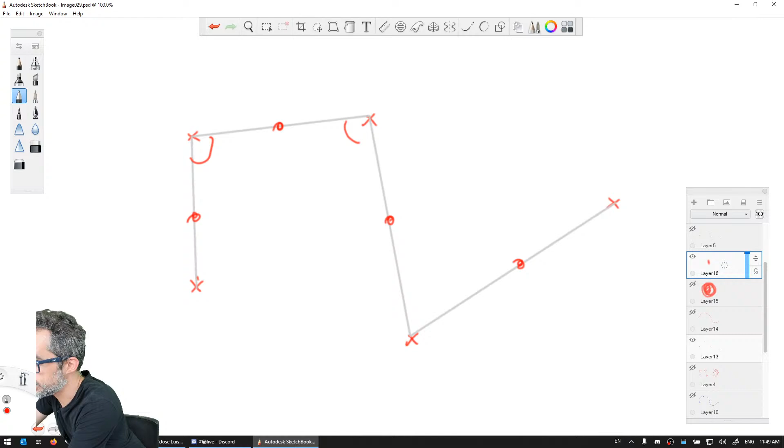Maybe you can find another one where maybe you take a look at these angles, and then you maybe want to minimize the average of those angles or you maximize that average. I don't know, but think about this problem as a problem that needs some kind of additional constraining. So whether that is adding this point to the calculations, or going through several iterations of Galapagos, or like a while loop or whatever, and trying many different polygons and keeping the one that has the shortest overall length or the shortest average of angles or whatever, that's absolutely up to you.

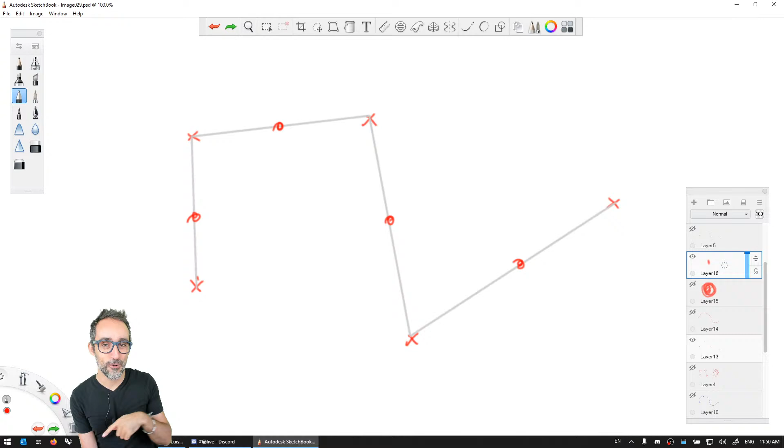Okay, you can choose whatever kind of approach to that, but I think this is actually a really cool exercise, and if we get this together, then this could be like a really nice path planning algorithm, for example, in three-dimensional space, you know? On top of that, to this polygon, we could then apply the Douglas-Peucker simplification, so that we have less points over it. We can do a lot of things here. It's going to be cool.

So I would like to propose that as the challenge for next week, and I believe it will not be next week. I believe it will be in 2 weeks, because next week I'm going to take it off. So I don't think I will be streaming next weekend. Okay. So, but yeah, I'm very excited about this algorithm actually. So I'm gonna leave that up to you.